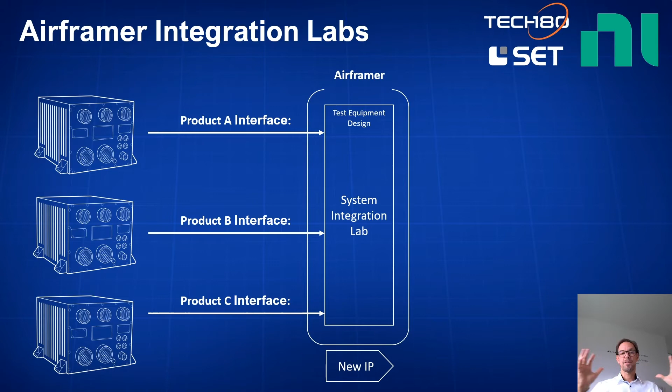But that's only the view on a component, on a subsystem. From Airframer's view, it is a completely different picture. The Airframer now needs to integrate all these products and all these different subsystems in one system and do integration testing and validation and verification. And that, if we follow that process, would lead to a huge system, a huge integration rig with a huge amount of budget and time. And still having these moving targets, because we have changes from one system to another, there's an inconsistency and we need to change requirements, and then the whole design flow of that test equipment begins from the beginning.

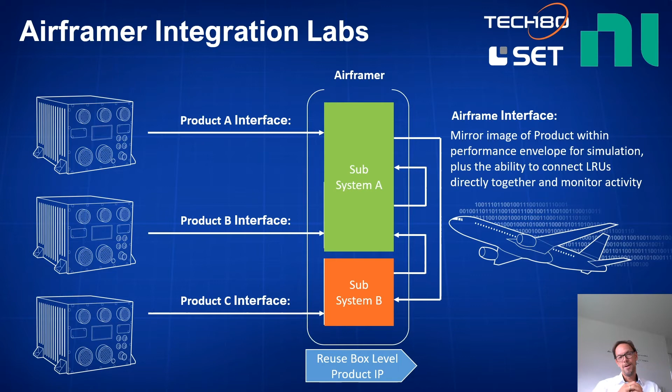But our customers, obviously, need more modular systems. They want to integrate subsystems on their own, and then be able, with a modular approach and interoperability, to combine one integration bench for a subsystem with another integration bench of another system. So for example, a primary flight control system on a subsystem integration bench to a secondary flight system on another integration bench. And in a perfect world, it would be perfect to reuse all that box level product IP, all this information and know-how built and developed already for the test equipment on a box level and component level side. And if we could reuse that on an integration lab side, we could get from there.

Good. So what is that test system impact? So the whole idea, just to cover that up, is to reduce the total cost, the risk, and of course the serial time burden of always reproducing the same IP and know-how in the workflow and the lifetime of the equipment. Making sure that all functional blocks are tested and ported to different lifecycle testers correctly, not reinventing the wheel all the time, and making sure that all these testers and integration benches can really interoperate and intercommunicate with each other in a proper way. So that would be a solution, and that would really reduce cost and time in the development cycle.

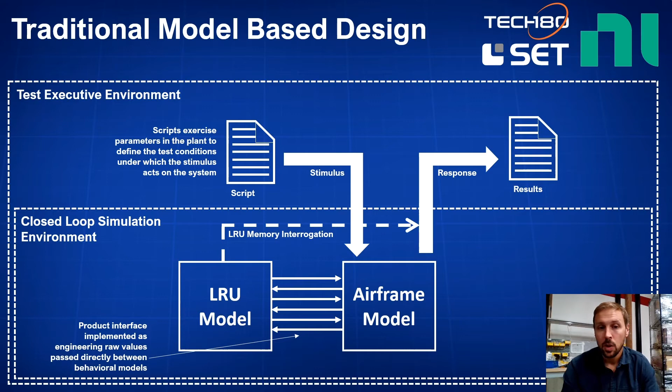You've got a model of the LRU that's on the airframe. You've got a model of the airframe itself. And you're passing back the engineering unit values between the two to drive a closed loop simulation. And the way you would test this virtual airframe here is that you'd use a test script in a test executive environment to stimulate the airframe model. And then what you do is you look for a response either behaviorally from the airframe model or interrogating the memory of the LRU to see that the software saw the right value.

Model-based systems engineering is going to be a little bit more complex. Instead of just passing back the actual engineering unit values between the software for the LRU and the airframe model, what we're going to want to do is actually take the whole system into account. So we're going to want to simulate the actual electrical interface of the product, as well as the actual electrical interface of the airframe, separately from the behavioral models, right?

So the interface model for the product is like a wrapper for the behavior in the software that's defined by that product interface document that we had described earlier. And likewise, on the airframe side, now we're simulating the wiring and the sensors and the loads, all the things that the product is driving on the airframe, separately from the behavior.

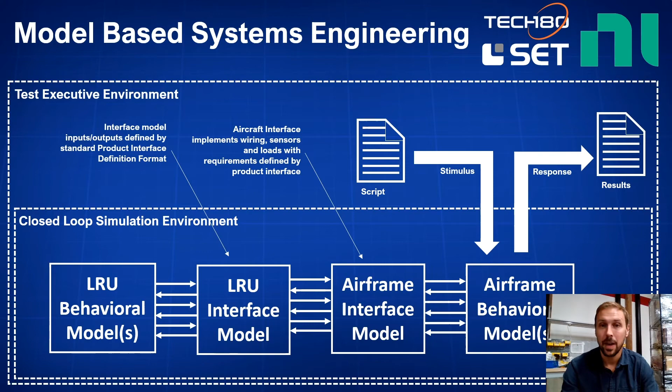And there's some real advantages to doing this. Number one, you're just going to get a much higher fidelity simulation of the entire airframe. And number two, though, you're going to have these interfaces that can much more readily be substituted with real hardware when it comes time to, say, take out the actual product from this simulation and replace it with a real product connected to a test system that is ultimately driven by those same test scripts in that same airframe behavioral model. So let me show you how that's done.

So ideally what we'd like to do is be able to take that airframe interface model out and replace it directly with a piece of test equipment, which means we want to generate the design of that test equipment directly from those signal-based requirements that are the output of your model-based engineering workflow.

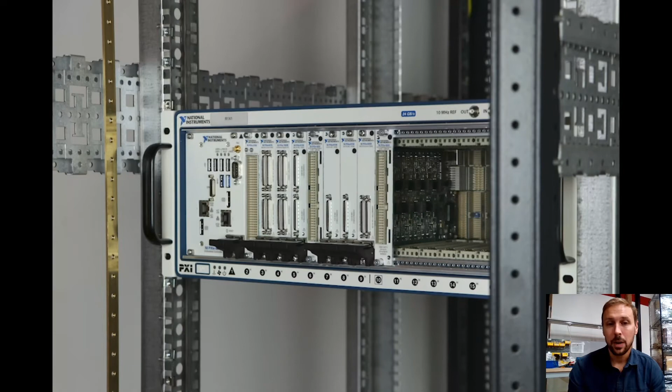So Tech80, SET, and NI have partnered to develop an off-the-shelf modular open architecture that allows us to synthesize the system designs directly from those product interface requirements. And using all off-the-shelf modular components, we can rapidly design and assemble this system using an agile, iterative approach that allows us to get at the exact piece of test equipment required for any life cycle phase based solely on those initial signal requirements.

So if we have the ability to generate test equipment from those product interface requirements in much the same way as we can generate those models from those product interface requirements, then substituting out the virtual components for real components becomes a pretty simple matter, right? The product models obviously get replaced with the real product. The interface between the product interface and the airframe interface model just becomes your cable harness definition, while the airframe interface model itself becomes the test system, as we discussed.

So that leaves kind of the software that governs the test system. That's going to be different depending on what scope that you're in, what life cycle you're in, right? So if you're talking about a full closed loop simulation and a validation environment, then you can kind of just leave the software environment intact with the airframe behavioral model connected to the test system in exactly the same way that it would in the actual simulation, right? So that's really just a driver level call to the test system hardware as opposed to just reading and writing values between models.

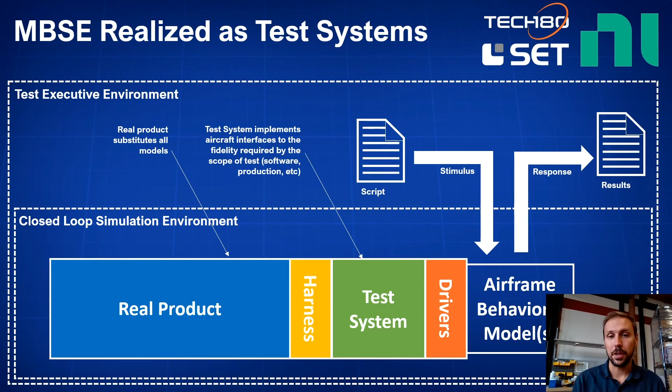But of course, if you're in like a production environment or an aftermarket environment and all you're doing is sequencing through a series of steps, that airframe behavior model can simply be replaced with the hardware abstraction layer of the test executive. So we get rid of that closed loop environment. So that takes care of the hardware piece, which should help us reduce the kind of duplicate effort of reproducing the same hardware system multiple times over the course of the program.

But in order to solve the other issue, which is to have multiple different workflows from all these different stakeholders interoperate, we're going to want to structure the software and architecture in a particular way. So instead of connecting the models together natively in any random environment, what we're going to want to do is have the models connect directly to a shared memory interface in every environment. That shouldn't have any impact on performance and is structured pretty much exactly like the programs would be anyway. But it's going to allow us to take the data in that environment and export it to other environments.

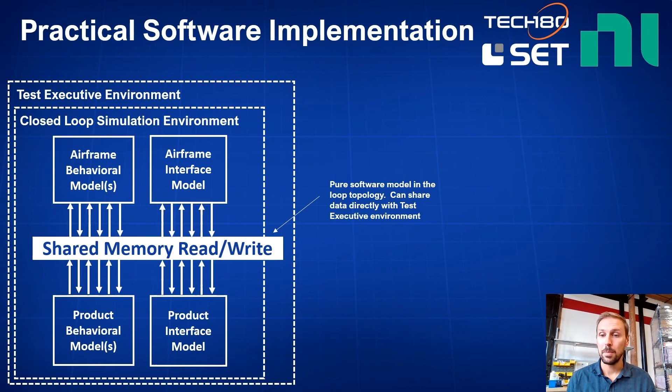So here you see that it can be connected to the test executive as well. So the test executive can write directly into the model and stimulate the models in the same environment that they're running in. The principal benefit of this is that when it does come time to substitute those models with the real hardware, we can implement that hardware on a completely different machine while still connecting it to the original software environment. Now that's really important to break that connection, because if we're going to have hardware that we know will meet the requirements given the product interface definition, we're going to want to separate the compatibility and the maintenance and the obsolescence support for that hardware from the original software environment where the models were hosted.

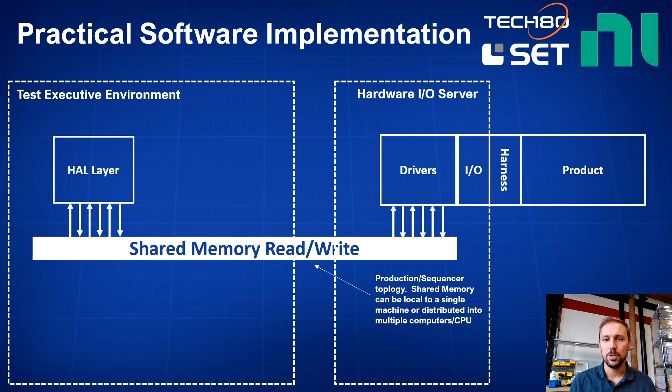And of course, if this is not a closed loop environment and we want to go to simply a sequenced environment for, say, a production test or something like that, again, we can remove the airframe model and replace it directly with a hardware abstraction layer to this test executive. Again, note though that the only driver now that anyone's workflow has to support is this read-write memory interface, as opposed to any specific vendor's hardware. This is going to be hugely beneficial, as now you can support any workflow or software environment from any particular stakeholder and use a single generic memory interface to be able to talk to the I/O subsystem.

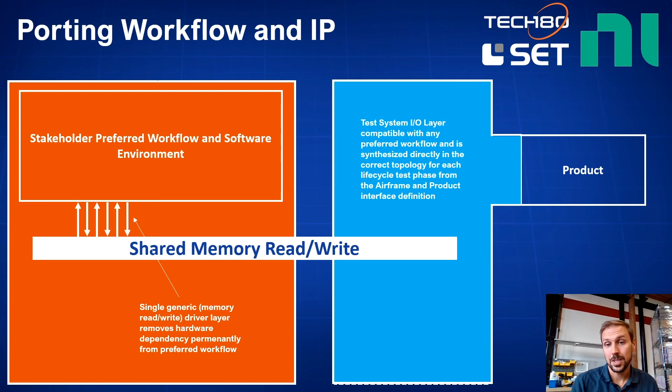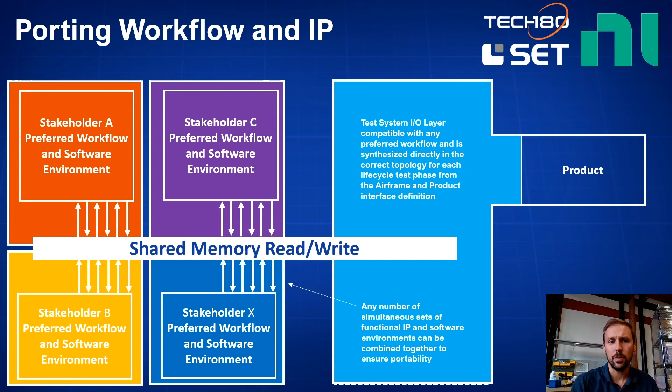Plus, you can synthesize that I/O subsystem directly from requirements, regardless of whether or not anybody is using the same model-based system engineering workflow in their own design efforts. Extending that concept, now multiple different workflows from multiple different stakeholders can actually be all combined together and drive one or more I/O system layers directly from the shared memory interface and all completely interoperate with each other without any kind of dependency or pre-planning in order for this to happen, other than the structure of the memory in the first place.

Okay, so to tie all these concepts together, we've got a product interface description that's generated by our model system engineering workflow. Now that descriptive language can be used to directly synthesize all of the different test equipment that you need in any particular lifecycle phase, all of which will use the same common modular platform to reduce the cost of development, but also maintenance and obsolescence planning for those test systems. But each one of those test systems can still support the workflow of all the individual stakeholders and have the option to port the IP that's generated in any particular lifecycle phase throughout the entire program, meaning that you can now get different test capability where you need it without going through separate design efforts.

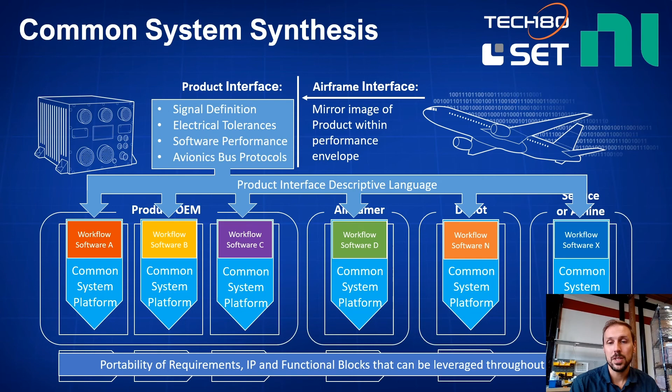This is of particular use for the integration lab folks, because now there's the possibility of specifying to the OEMs that they deliver test equipment using this common system platform, but they can do that now without incurring additional cost and time because their OEM workflows are supported natively and don't need to be modified.

And then the Airframer has the option to run their own workflow, again, on the same common system platform. And this is going to give everybody the ability to optionally leverage all of the different things that are already being developed for the product line anyway, to all the other stakeholders within the program.

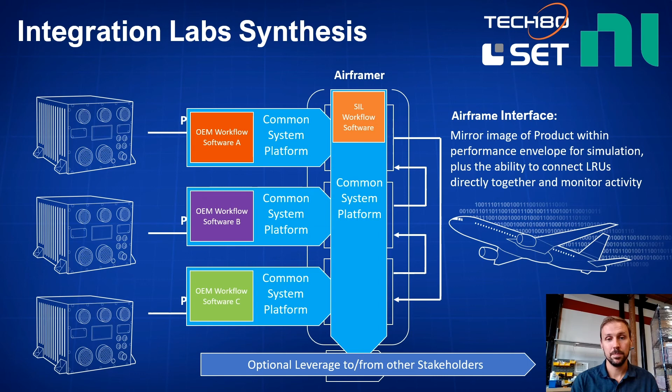So let's recap what test infrastructure needs to do to be ready for a model-based system engineering workflow. That virtual environment is going to produce standard product interface descriptions that are going to allow parity between the virtual domain and the real domain. And it's going to describe what requirements coverage we're going to need to provide in any test equipment that we generate.

The common hardware framework that NI, SET, and Tech180 have developed can implement equivalent requirements coverage at the pin in multiple workflows and software environments. And that's going to allow us to port all of the different functional blocks and IP between the different product development life cycles to get greater efficiency and reduce the cost and time that it takes to execute the program.

Okay, so a little dose of reality. It's going to take years for the aerospace industry to roll out model-based systems engineering at scale and see the type of benefits that we're talking about here. It's an evolutionary transformation. And as with any kind of evolution, the difficulty lies in laying the foundations and infrastructure necessary to be successful in the future, while also delivering on the programs that you have to perform on today, right?

And so our approach, we believe, has the ability to help make that incremental progress and keep you moving forward in a direction that's getting you closer to the goal of practically rolling out this type of model-based system engineering workflow. Now, the way that we can do that is that we can essentially compile test equipment designs from interface descriptive languages. And whether or not you have something that's producing those descriptive languages right now, Tech180 and SET can synthesize that directly from your requirements. And that's going to save you all sorts of time and money and carve out the budget that you need really to make that transformation.